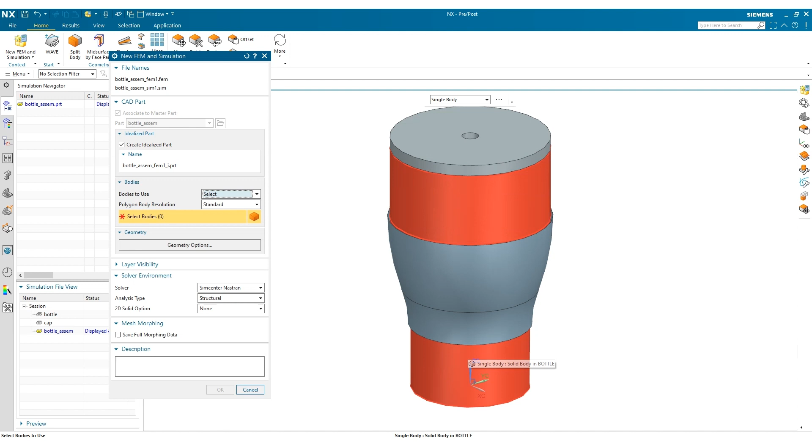Now I'm going to select new FEM and simulation, and I should see this window. I want to make sure create idealized part is checked. In bodies to use, I'll change that to select, and I'll select which bodies I want to look at and analyze, then select OK.

Now in this solution dialog box, I'm going to select create solution. I can change any settings here if I wanted to, and I'll select OK.

Now if we look in this simulation file view dropdown, we can see all the different files. Let's widen this column. You can see we have our CAD, our idealized file, our FEM file, and our sim file.

Next, let's enter our idealized part file. So we'll click on that and click OK. Nice, we can see our idealized file.

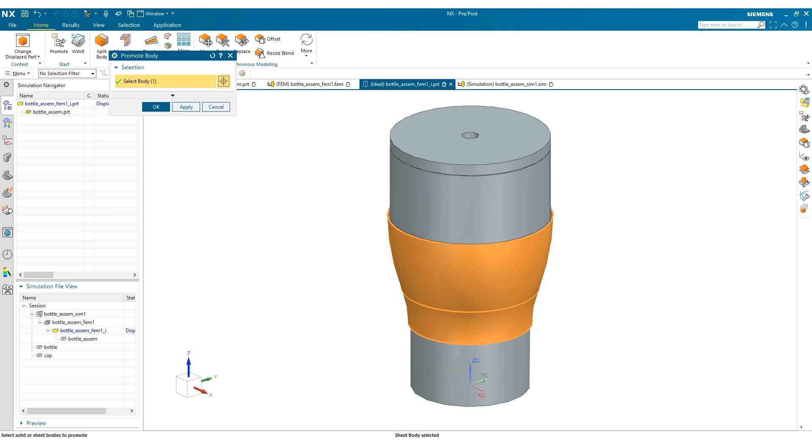We're going to select promote, and in this promote body dialog box, we'll select our body and select OK. The idealized part cannot be modified without promoting or wavelinking it, which is why we needed to use this promote tool.

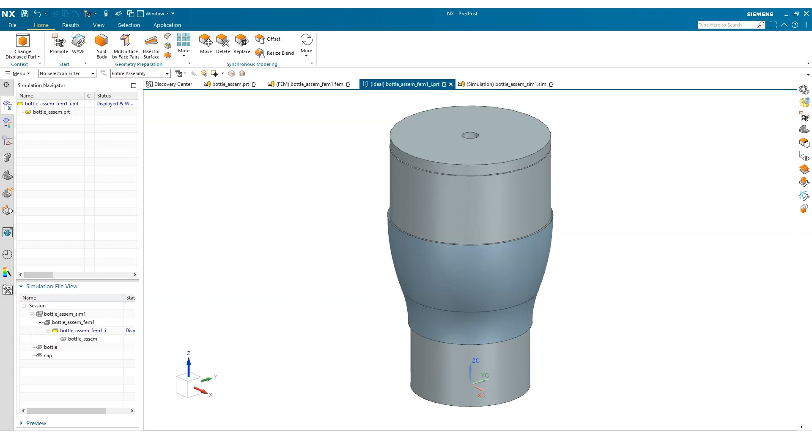Next, we want to create a material record, so we need to navigate to the FEM file. We can exit out of this information box, and we're going to go to Manage Materials.

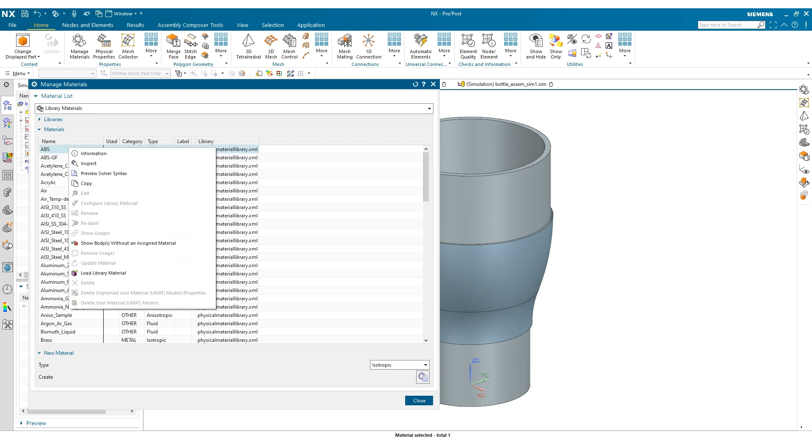Now we can either select a material, but in this case I would like to make a new material for this silicone piece here that's not on the list. So I'm going to right click on ABS and select copy.

Now I have this isotropic material window where I can create a new material, name it whatever I want, and then change the elastic constants and the stress strain related properties. So let me go ahead and do that now. Now that I've confirmed the name and the properties are correct, I'll click OK.

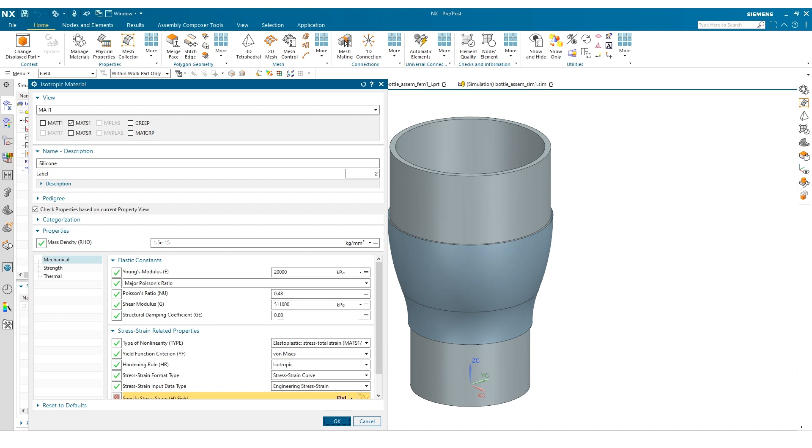Now in this Manage Materials dialog box, I should see the new material I just created, and I can select Close.

So now I want to create the 2D mesh collector for this part of this component. I'm going to go to Mesh Collector in this FEM file right here, select 2D element family, and then set the collector type.

Thin shell is fine, and I can set properties in create physical, which is this icon next to shell property. It'll open this dialog box, and I can change these settings as I wish.

So here I'd like to change the name to Silicone Grip, and I'm going to change material 1 to the material I just created. For default thickness, I'm going to type in 0.1, and I'll select OK.

And then I'll see this mesh collector dialog box. I would like the name to be Silicone Grip, and select OK.

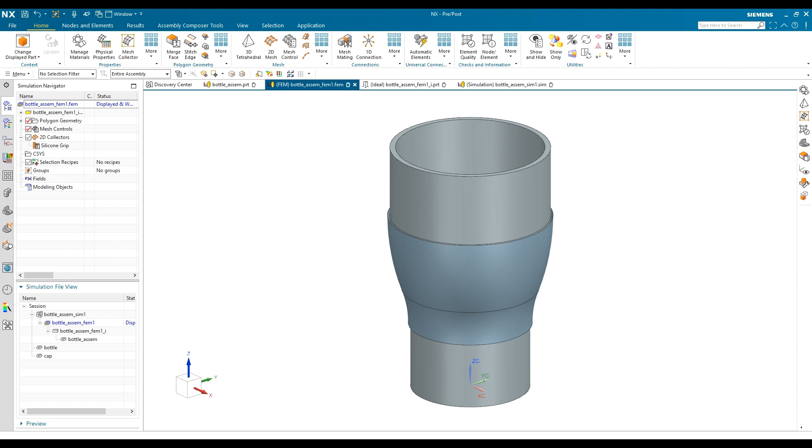Now if I look at this 2D collectors dropdown, I can see that mesh collector I just created.

Next, I can change the color of this mesh collector. If I right-click Silicone Grip and click Edit Display, I can change its color to whatever I wish and click OK.

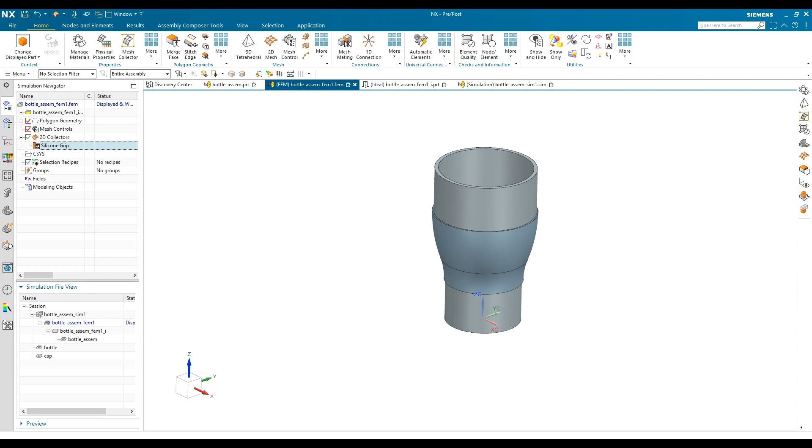So now I can drag my mesh to this mesh collector and it will inherit those properties. But first I need a 2D mesh, which I will create right now, and there will be an additional video you can watch on creating 2D meshes.

Okay, I've created my 2D meshes, one for this grip portion and one in green, this cup portion, and right now the 2D mesh for the grip is under the Silicone Grip mesh collector and inherits those properties. So if I moved that mesh to the thin shell mesh collector and clicked apply defaults, then it would take on the properties of that mesh collector.

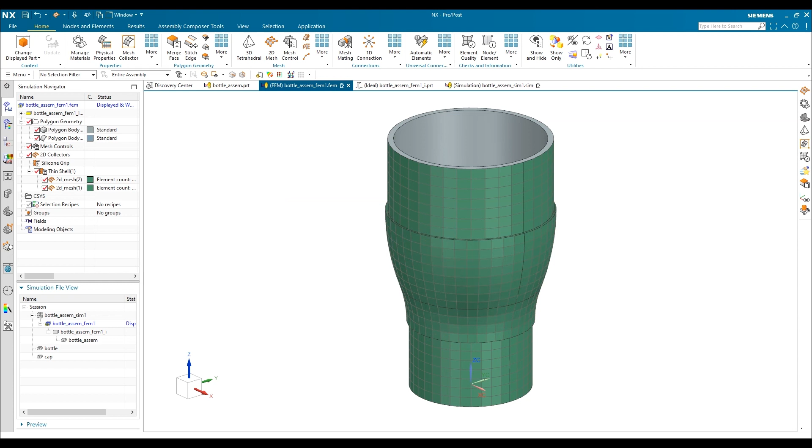So I can use these mesh collectors or folders to assign material properties, color, and display properties to different parts of my mesh for this body.

So this is backwards, I'm going to add that back to the Silicone Grip, click apply defaults. Back to thin shell, apply.

And that concludes this demonstration on creating 2D mesh collectors in Simcenter Nastran. Thanks for watching.